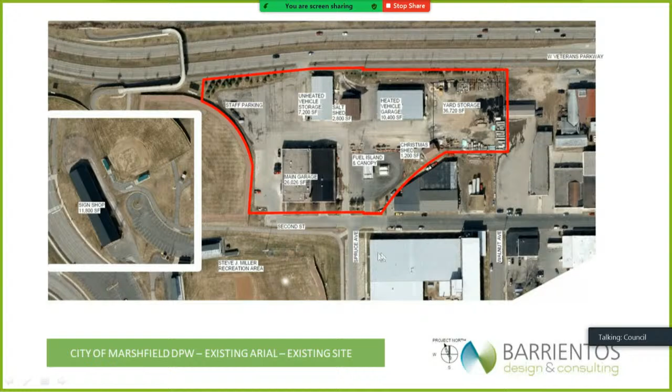As Dan said, the 5.8 acre site next to downtown and the recreational field just couldn't fit the modern updated program. What we came out of that was this optimal garage plan of the main garage, a 75,000 square foot facility.

On top is a truck wash drive-through with an underbody wash. Then you're seeing a parking bay with medium duty trucks, heavy duty trucks, and light duty trucks, with a full complement of floor drains and ventilation.

Off the parking, to the right, there would be a repair bay, which is currently the most deficient area operationally in your garage, both in terms of height, width, equipment, and the number of bays.

Then there's a welding fabrication area off the repair bay, separated for the smoke and noise generated, and also the amount of equipment like grinders, welders, and steel stock. Then here we have a sign shop.

The parts area is here, and I'm going through this because in our other developments it follows the same relationships. We have the parts area where a UPS or vendor would come and load off parts, mainly for vehicle parts. They'd be stocked and then distributed to the mechanics or to the field operators on the backside.

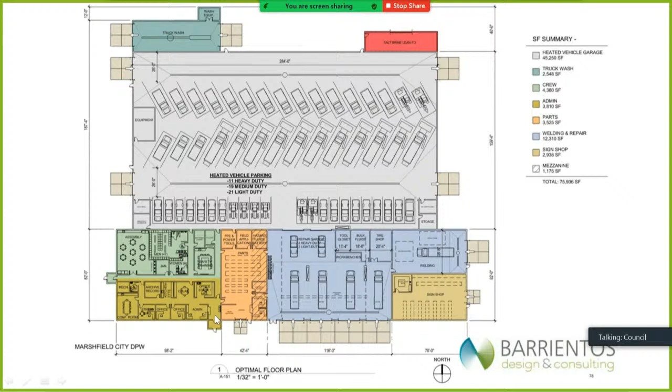During that study, we developed an optimal site plan. If we had sufficient land and the right configuration, we would like 10 acres for this site, ideally rectangular with two entrances where trucks could flow in, park, wash, or circulate over to salt or pick up items in cold storage and circulate out. Staff, visitors, and vendors would come another way and park and come into their areas, crew quarters, admin, or parts. So that's the general layout.

Off to the side, there's always bulk stock items: culverts, pipes, castings, soils. Some of these are put into bins. What's key here is getting the right amount of space for trucks to move around and back up, and the right kind of area for them, be it gravel, stockpiled bins, or asphalt areas. Stormwater is another area too that has to be addressed in the new one.

The other item is a fuel station, and we want to put the fuel station like you have now, where non-street trucks could come in and go throughout the day, anytime, without getting into the yard of the facility. So that was the optimal.

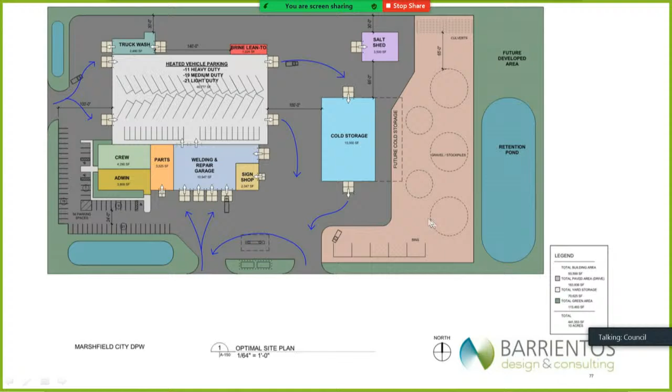Now, for the Wood County Highway Shop, they have this 18-acre site on Galvin and East 21st Street. There's a junkyard to the south and a business park to the north. As Dan said, and what I learned too later on, is that the county does not fully utilize this site. They have been discussing adding on or improving their current garage, which they have here right now, and that houses - I'll go through the program on that - but it needs to be expanded.

They have their salt shed, fuel station, truck scale, and another cold storage shed. They also use the stockpiler here, and they are doing some stormwater improvements right back here right now.

They've got their main entrance off of South Galvin Avenue here, and so they don't fully utilize the site. They use up about 8 acres, and here we have 10 acres. They don't use all of the 18 acres, and that's just the amount that the streets department has been looking for.

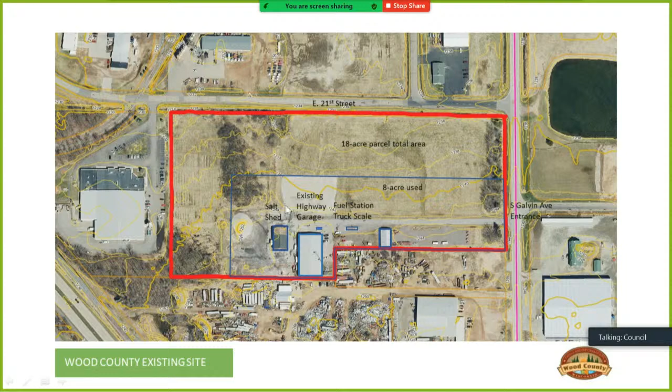So far the puzzle came together pretty well. The next step was, well, could it all fit? Can we get both highway and streets together here? And that's where we started diving into what's there right now.

That's the county's main garage there. They have their main shop in Wisconsin Rapids, and that's where they have all their repair shops. They only do certain things here, mainly truck storage, minor truck maintenance, just field parts storage. So it's a satellite shop.

That's the building. It's about 50 years old. It's a steel building.

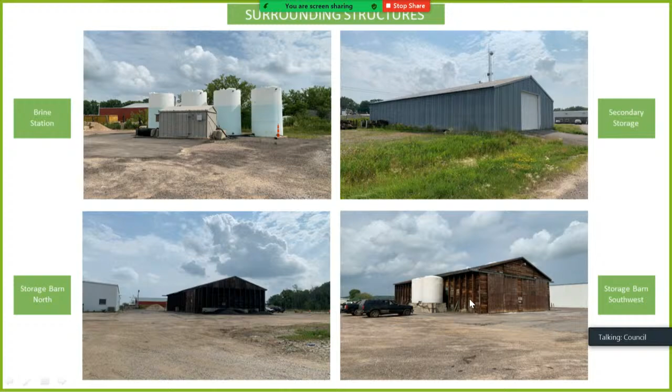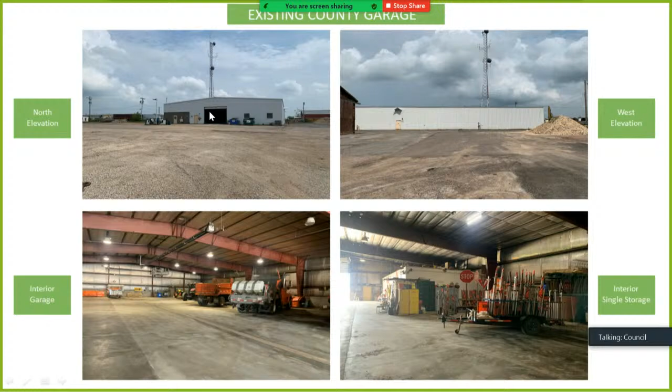And they have facilities for salt brine, some cold storage, their salt shed. But the county has expressed an interest in, with this coming together, that they would just convert this into cold storage, no longer try to make it a heated truck barn.

I'm not going to go through all the numbers, but what we did is we sat down and interviewed the county's staff and took their facility needs for how much staff they have by function and identified their staffing. They have 26 people located here, the city has a total of 55. And I have the different departments there, broken up by different positions, mainly so we could also identify the number of lockers and people that are going to be sitting in the assembly area.

We also took the county's truck and fleet count and divided those up into different kinds of parking stalls: heavy, medium, light, and others. So they're bringing in a total of 32 vehicles, of which 19 are heavy, a lot of the patrol plow trucks. And then the city has a much larger fleet count, 117.

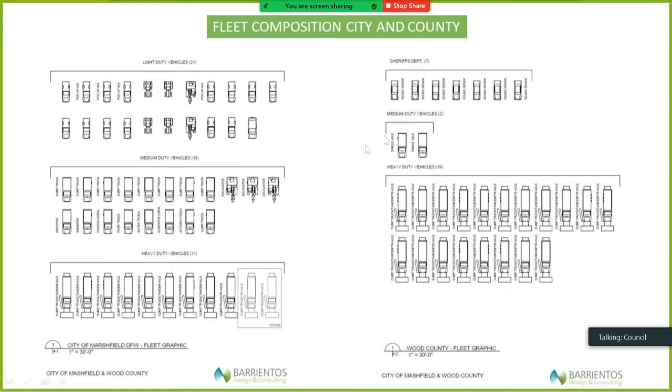Here's a graphic of the two agencies' fleets. This is the city's fleet, and on the other side is the county's fleet. Just you see all the trucks lined up that we're going to try to park in this.

Then, let's see, sorry.

What this is doing is, if we combine the facilities, we came up with a main building of 125,000 square feet for both. And that's the parking, repair garage, truck wash, part storage, crew area, and office area, and sign shop. That building would now be 125,000 square feet.

Individually, we had the city's building being, if they're apart, at 73,000 square feet, and for the county at 37,000. Now that's our target based on room by room estimates. Once we get to the floor plans, they shift as the geometry finally worked out.

And then we have various cold storage buildings too that they both need. So option one is level integration 2, where they're going to share various facilities on the site. And in the end, we ended up having all the options share various facilities for the most leverage and usage of these between the two agencies.

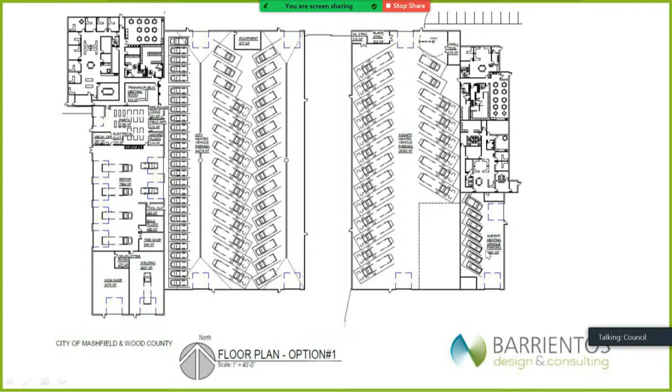And then there's some more detail on what's all in the office area after we discussed with the city. Different from the prior one is we brought in all of engineering, all the public works administration would leave from here and go into this facility, so you'd have combined engineering and operations. That's the close-up on the county area and then the sheriff's area.

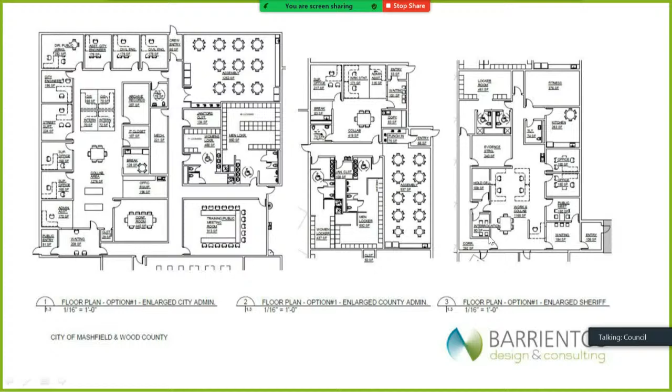I'm going to jump back up. I probably should have put this here first, but option one allows for easy separation between the highway department and the public works. And this is going to become an issue—I'm not an accountant, I'm not a lawyer, I'm not a business consultant either.

It's the next thing the city and county, if you continue discussing this, is how to manage and pay and whatever you're going to do to make this joint facility work. But this facility allows for there to be a distinct building for the city and a distinct building for the county, so that there could be separate meters, separate cost accounting between the two, very clearly defined area.

So we thought that could allow for a better separation of ownership if you actually literally drew a line of that's city land, that's county land around it. It helps, it has better site circulation. It does increase the building square footage a bit—now you have this extra wall, whereas once you brought it together, you got rid of that fourth wall. It shares all the truck wash, fueling, the scale, the bulk materials, so it's highly leveraged.

And the county, the sheriff department is within the county building, but they're zoned so for security in their own corner.

All right, so this is the summary of square footage. We have a 74,000 square foot city building, the county is 48,000, and then there's various shed buildings.

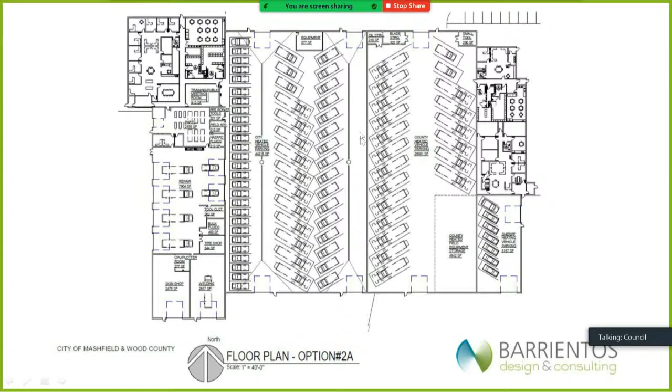And that's the combined building, with almost a demising wall, and their floor plans, the overall building.

And the cost is less on this—from 35 down to 34, so about a $900,000 difference, bringing the two together.

And that's 159,000 square feet, $214 a square foot. I will say we also do a lot of cost estimating, we do a lot of garages. That is the cost these days for a garage—about that is the going rate overall for our facilities.

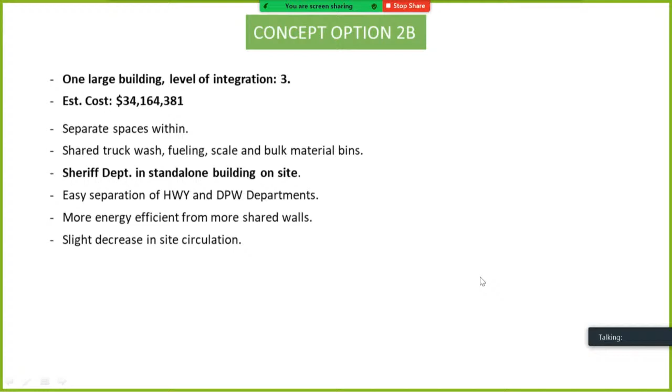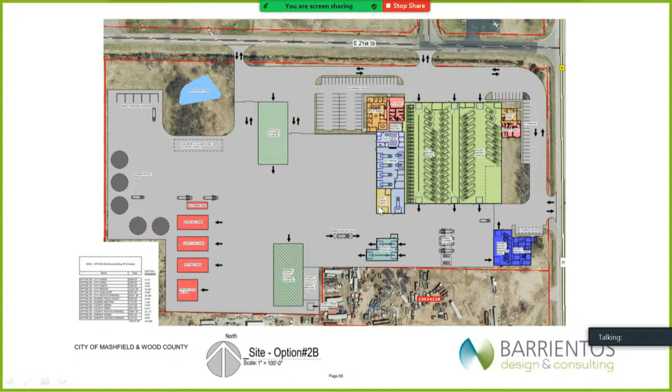So option 2B, the difference here is we pulled out the sheriff. We had some discussion that maybe the sheriff needs more independence, more room, more security. Maybe we can use this parcel of land down here better and move the entrance up a little bit north on Galvin. It did shift the fueling, so the trucks come through here now and then pull in that way. So maybe that's more of a county discussion, but we were looking at where to put the sheriff, maybe they have their own defined building. This doesn't affect the city except how the entrance is laid out.

And see the, oops, sorry, that shouldn't be there. 2A. Similar building size, square footage, and then the building, it's about the same square footage cost.

And then the final option that we're going to show is also a very shared facility where we have the locker rooms and lunchrooms all shared. Crews from the highway and the city come in there in the morning. They'd have to define their own areas, but it'd be one locker area, one set of showers, one kitchenette. The superintendents or supervisors would have to figure out their corners where they're going to meet with the crews in the morning. One common office area, but they might each go in a separate direction.

What we did is there's a common area for the office, the locker room. There's no change in the repair garage, welding, or sign shop. In fact, we even discussed you could mix up the parking even. While right now we're showing it all county and all city, it could be arranged to one big truck barn for the two agencies.

And this cube here came up later as some extra space. We could have teed it off here, but as we discussed, the county thought that'd be a good area for cold storage for tractors, mowers, small engines, things that come in during the different seasons, generators, signboards. So we decided to add that in.

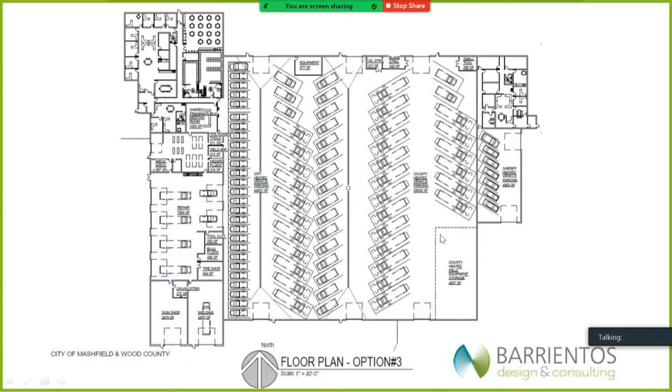And detail on how to have the common entrance. County is one area, the city is another. So there's one entrance, but you go in different directions too. So it can be done. It's, I think, really more of an operations management issue. Do you want the crews together in the same locker, lunch area?

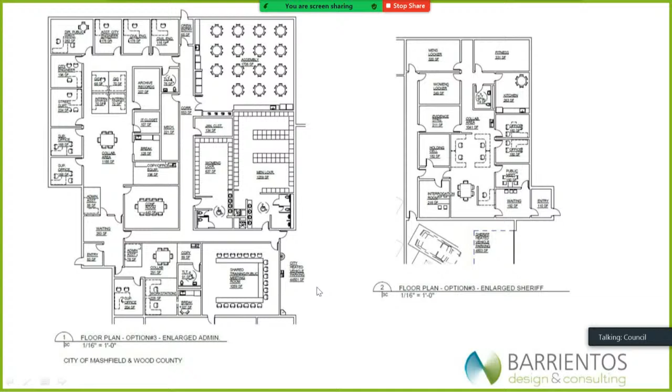And they're sharing a safety training area as well. Sheriff, the other end. So that is a less expensive option. So bringing the two together, we don't duplicate a locker, we don't duplicate all the showers, kitchenette and the lunchroom, all the finish areas, all the hardware that goes with two different doors.

I really think it's more a matter of operationally being all together in close quarters, and again, I'm not an operations consultant in that way. But as an architect, we see that is the tightest arrangement. They're just blended. In option 3, that's the highest level of integration that we set out to explore. Option 2A and B are a level 2.

They're sharing the site and the building, kind of back to back. And then option 1 is kind of halfway between integration level 1 and 2. The buildings are pulled apart, so you can more readily define, okay, that's city, that's county area.

And again, this is a concept. As we discussed and met, other things came up, and I think the more we met, the more we thought about it. While we aren't going to recommend one, initially we thought the 2A concept, share the wall, fine, we'll get along and share that wall. Then toward the end of the study, I thought, well, maybe concept 1 is better, apart. So I can see this is going to go back and forth. I don't think you need to decide that now even, it's just that it's a healthy discussion.

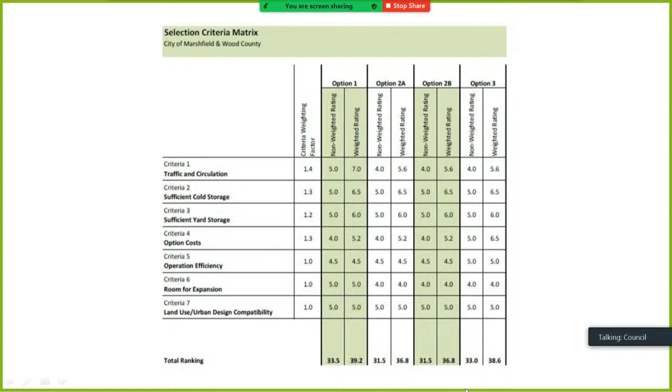So again, this is something that it's so close, it's really up to the city and the county to keep pushing this discussion and examining it further.

So we'll end the study here. At this point, we're recommending option 1, and that would be beneficial to both the city and the county from an architectural facilities point of view.

What we recommend next, at least from an architectural engineering point of view, is after you've decided which approach is best, move onto one of these options. They're very conceptual, so sit down again, talk with the city and county staff, work out a lot more details, start doing preliminary engineering, site design, utilities, site planning, approvals, hookups, explore the soils, assess any environmental issues, take this further to city planning, maybe even community meetings, and develop a further level of cost definition.

Right now, Kraus-Anderson took our estimates off a plan diagram. We don't have any elevations or sections. We didn't specify if this is precast or if these trusses are 50 feet long or 100 feet long. There's a lot more definition that needs to be done on this.

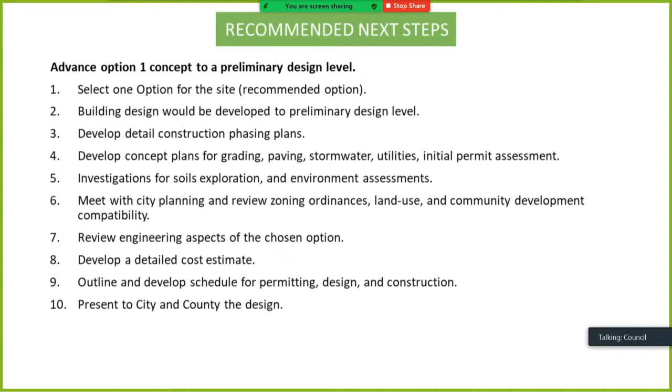So that's the end of my formal presentation. And again, if you want to drill down to the costs, I've got Kraus-Anderson here. So I will stop here right now.

Okay, so there's no recommended action for tonight, it's just for information. Item D is a discussion and questions from the council members and Wood County officials. So we'll open the floor up to discussion, and I guess get my attention somehow by raising your hands. Mr. Butke, I can see you're raring to go. Thank you.

One of the problems we had over the years is space for expansion for future years. I know that's a bigger site, but is there quite a bit of room for expansion for both entities? We don't want to run into the same problems in a few years.

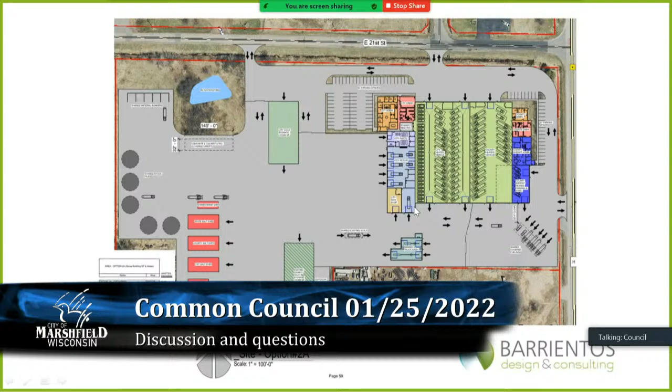Take option one. Yes, there is, although it's mainly for a cold storage shed area that you have room for. So we were thinking another cold storage building could go in this area. The site could expand out this way, but we'd have to realign the fuel station, the truck scale, and the truck wash into another area. So that's an area that typically garages outgrow, the heated parking area. We could expand this about another 15%, but otherwise my vision is aligning another cold storage building out on the site for both the county and the city.

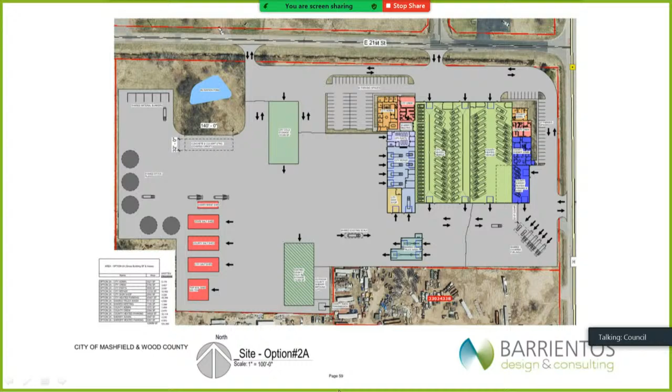Yeah, I guess I would question the cold storage without talking to our people. If that's what we need, more cold storage or what, that's all got to be discussed, could be tempered. But again, I've seen over the years too many instances where we didn't plan for the future. We want to make sure we're spending right. That's a good point — either way, we're going to spend a bunch of money if we've got to do it right, whatever that takes. Thank you.

Sure, Mr. Witzel? Thank you. A couple quick questions, going off of what Mr. Butke mentioned — would it be feasible to take that building and rotate it 90 degrees so that if there needed to be an extension, it could go out into the open space? It seems to me that trucks don't get smaller, we would need more storage for the trucks, the fleet's not going to get smaller. So it would make sense to me to configure it so it could expand the garage more than the cold storage. But besides that, I did have a couple other quick questions.

If you could go back to the costs slide that shows the comparative — the very bottom one, yeah, that one there, thank you. So the total costs you have here, is this for the total site development or merely for the building? Site and building, everything, including CM fees, architect fees, engineering.

I guess I'm a little surprised that 2B is cheaper when you have a separate building for the sheriff department. It would seem to me like if you're pulling a building off and developing a separate building, the cost would be higher than a 2A building where it's incorporated in. But that's why I was wondering if these were total site analysis or just the main building analysis. It's everything. Any comment on that, Seth?

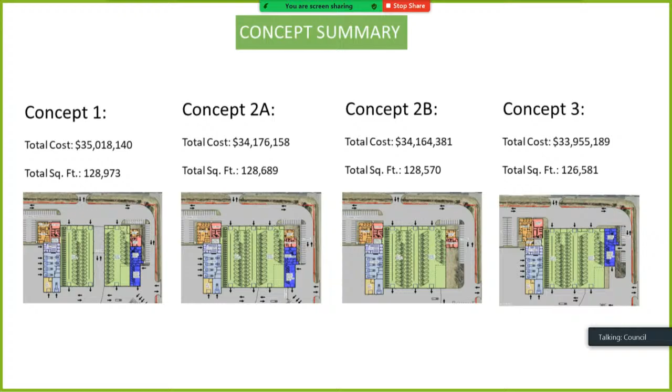People on Zoom - can I hear just you? Have you step up to the podium? Oh yeah, yeah, people off-site.

Sorry, for 2B, you still have the same structure, same footing, and you're building the same building. You're just moving program space from one area to another. So if it's attached to the building or we pull it off to where it's shown on 2B, we're still building the same building.

I guess the only other question I had, and I don't know if anybody here can answer it, but it seems like between concept one and concept 2A, which are essentially the same except they're smushed together, operationally there'd be maybe a slight benefit. Heating costs, for example, if you have a shared wall, I would think your efficiency would be slightly better. Do we have any kind of analysis on efficiency cost? Because it's one thing to put up an awesome garage, or in this case maybe a couple garages, but there's also long-term costs to run that. Do we have any analysis on that?

Just to maybe touch on a couple things related to your last question and this one - like Norman mentioned, at this point a lot of this stuff is relatively high level. The points about flipping buildings and things like that are all good discussions to have. The basis we use to generate a lot of this cost is based on historical data. We go back into our project files and say, okay, here are the attributes of these facilities - what do we have similar that we've built in the past? We time and location that stuff to this location, this year, knowing what we're up against.